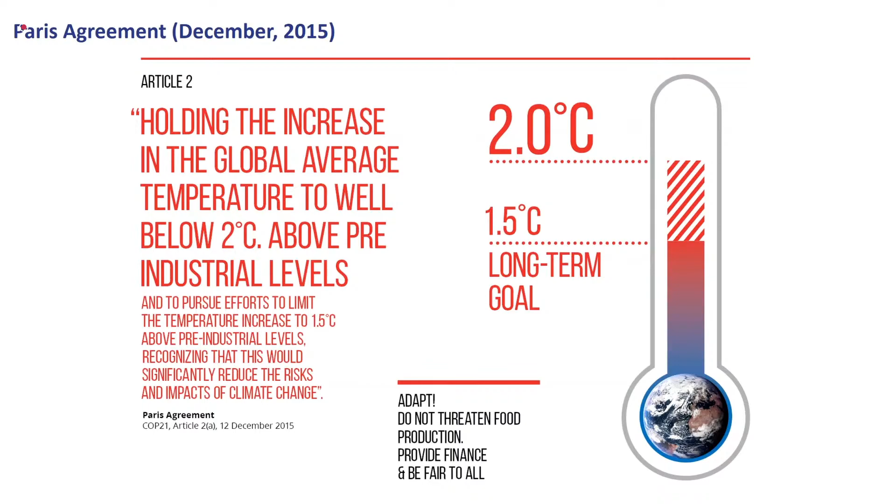There are many certifications, policies, pledges and targets going on right now. Even if we follow those targets and certifications, we could still end up achieving between 2.5 to 3.5 degrees Celsius. So how can we achieve a target of 2 degrees Celsius or even less, 1.5 degrees Celsius, which is the main agenda of the Paris Agreement?

So not focusing on the final goal, but limiting to the shortest goal they have actually launched, which was to attain 40% greenhouse gas reduction by 2030, and 95% greenhouse gas reduction based on current stage reduction by 2050.

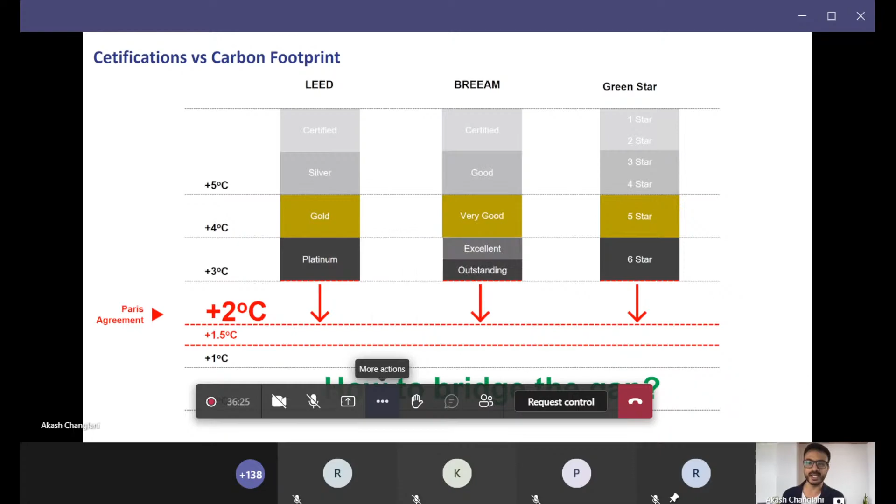There are some certifications you might know about, like LEED, BREEAM, Green Star, which are very commonly used nowadays. But even if you graph these targets, they don't actually help achieve what the Paris Agreement was aiming for. Even the highest certification level, LEED Platinum, only helps you achieve 3 degrees Celsius, not 2 degrees or 1.5 degrees.

So how do you bridge that gap? How do you attain such climate-free construction techniques? Foster+Partners is one of the first architecture practices which signed this net zero carbon building commitment.

And the company has also pledged to make all the buildings used by the practice carbon neutral by 2030. So I will introduce you to some of the approaches that can help achieve such intensive targets.

Let me begin with passive design. This is mostly the first thing that comes to mind when designing a sustainable project. This strategy usually takes advantage of the external climate to maintain a comfortable temperature range inside the room. Some strategies you might be aware of are natural ventilation, daylighting, shading, passive cooling and heating, use of renewable energy, and use of natural materials.

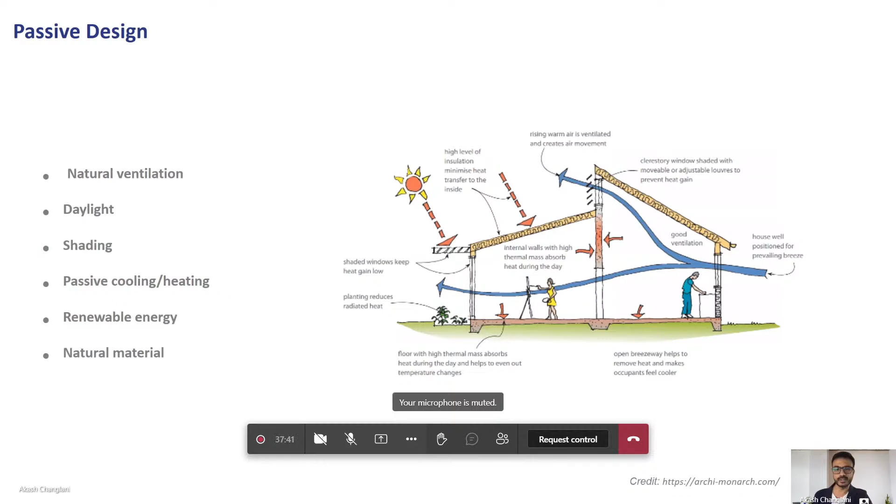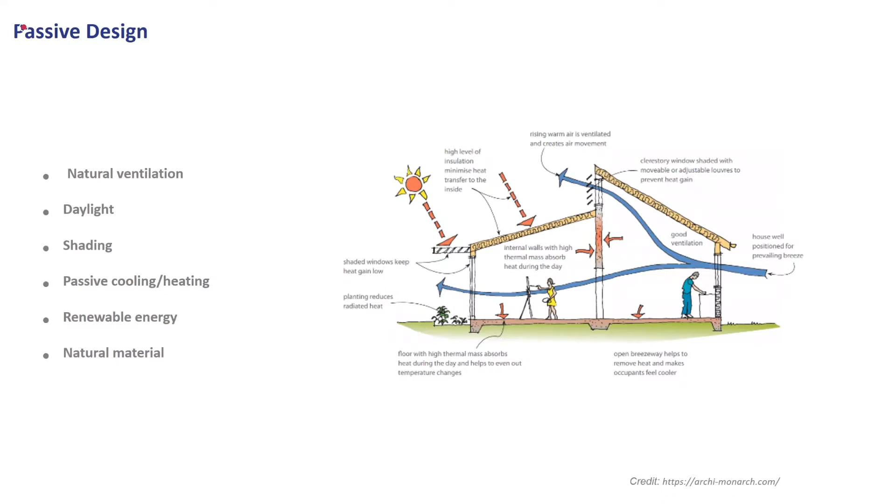You will come across such strategies in even more detail during your education. But today I'm not here to explain passive design or show examples of it. I will be taking this a little bit further.

After you have decided what passive features to include in your design, how do you quantify the performance, and how do you know that the comfort level of the passive system will be achieved? How do we know the strategy is working, and how do we achieve the optimal performance you're aiming for? So what is the next step to go beyond passive design for sustainability?

This leads to our second topic, which is performance-driven design. This section will show an approach to achieve and quantify optimal performance regarding several aspects. One approach is the computational design method, which includes three main steps.

You might be aware of tools like Grasshopper, which make crazy shapes and forms, but that tool can do much more than that. Those crazy shapes and geometries come under only the first step, which is parametric geometry, where you can alter the design based on parameters. Taking this tower as an example, you can twist it, change its height, or alter its cross section.

The second step is performance simulation, where you can run simulations using plugins within Grasshopper, available for daylighting, energy, radiation, wind, and many more. The third step is to optimize.

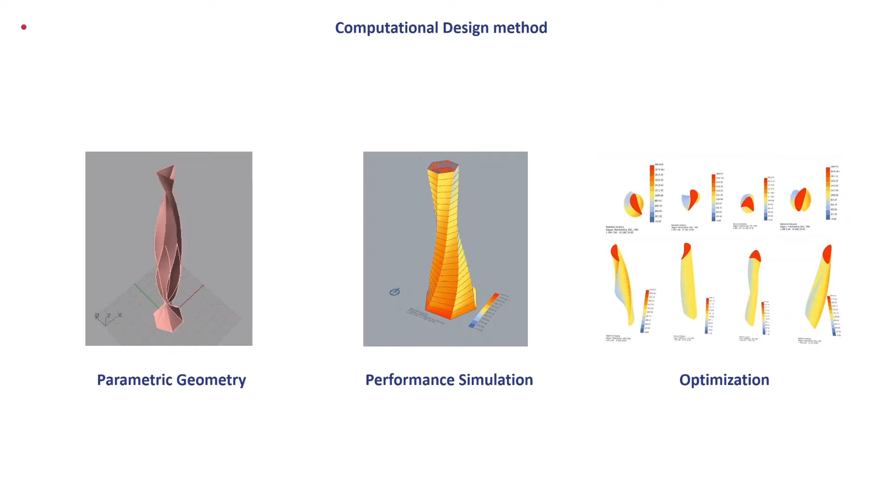Let me take you through one of the examples I worked on. This first project is my graduation master's thesis called Facade Elite, located in Rotterdam, Netherlands. The main topic was facade optimization for visual comfort through controlled daylight distribution in high-rise office buildings.

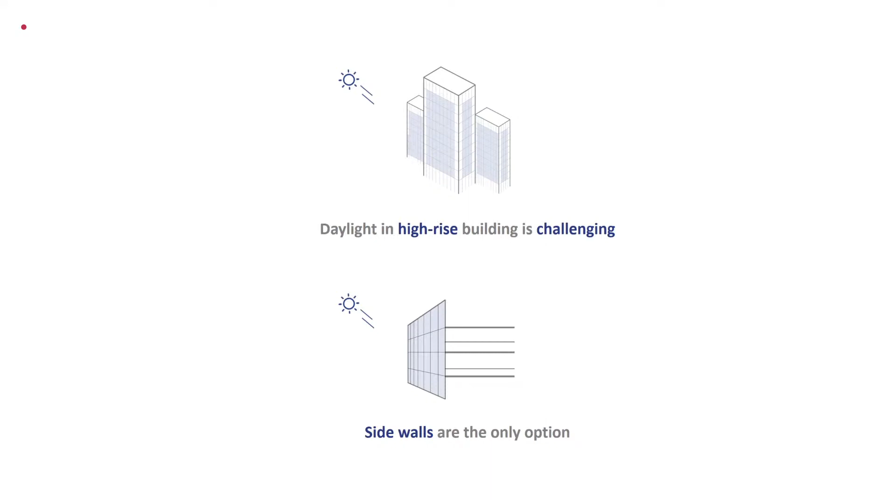Le Corbusier once said the history of architecture is the history of the struggle for light, and it still remains true. One current struggle is seen in high-rises, which pose a challenge because only side walls allow light to penetrate. In deep floor plans, like office buildings in high-rises, this creates glare near the window, and light doesn't reach the end of the depth.

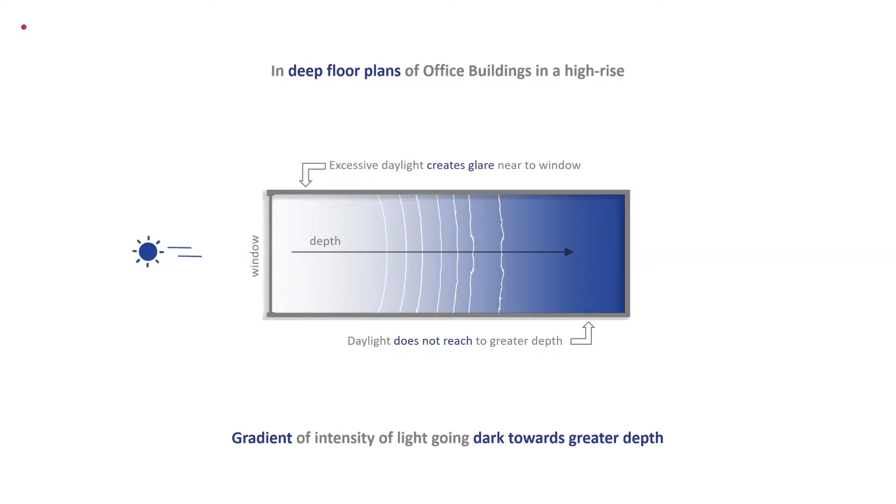This creates a gradient of light intensity that goes darker toward greater depth, resulting in a non-uniform distribution of daylight and visual discomfort for occupants of that space. You can see here how people react to these different light situations.

The ideal solution would be to bring a more balanced distribution of light along the whole depth. How can we achieve that? Here the solution is difficult, and we can question ourselves why. Because daylight has a dynamic nature, the daylight intensity and sun position change throughout the day and all along the year, which brings complexity into the design.

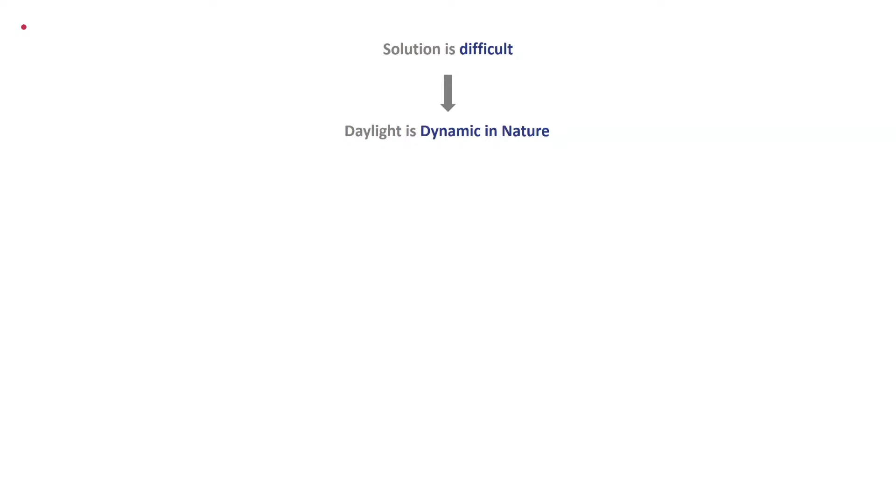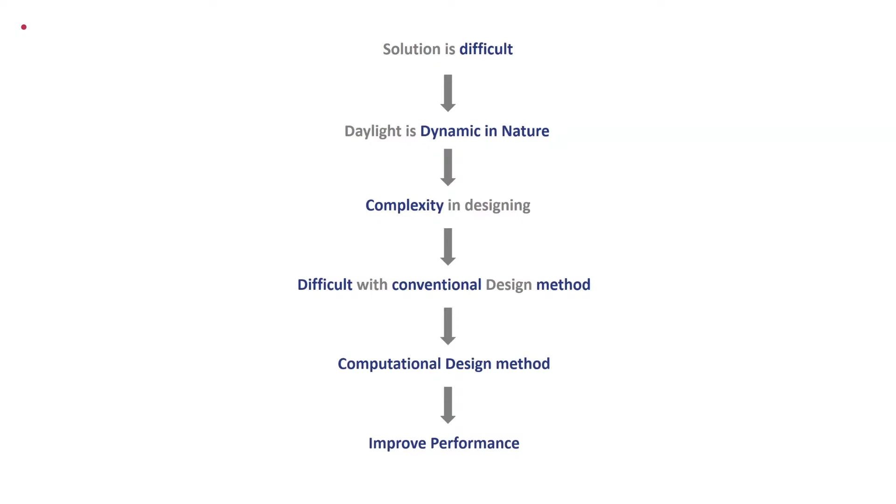So how can you achieve this? Usually with conventional design methods it's difficult to quantify how we will achieve it. Computational design is one way that allows us to solve this kind of issue, to have improved performance and get the most optimal solution.

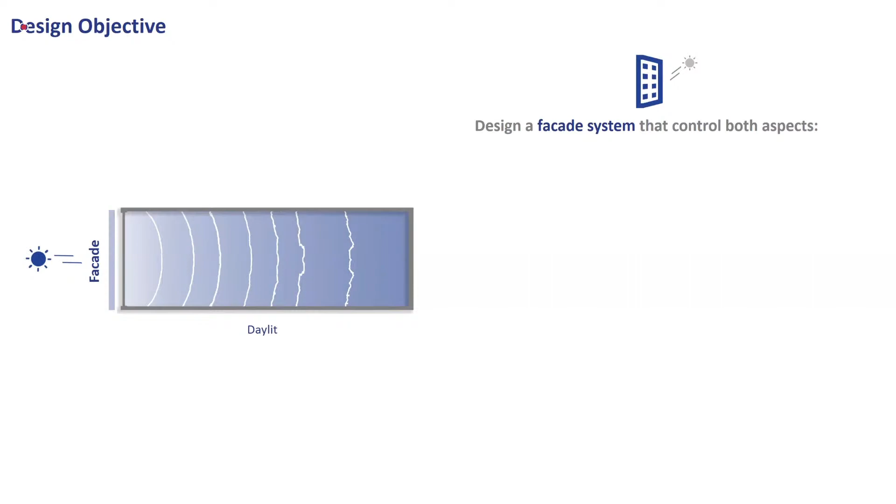My main objective in this thesis was to design a facade system that controls both aspects: enhancement of daylight for greater depth, and reduction and diffusion of daylight from the front, overlit zones that create glare, to achieve a uniform distribution. It should be adaptive and responsive to dynamic daylight, and in the end, it should provide visual comfort.

Based on this literature study, I formulated some visual comfort criteria, combining NEN EN 17037, BREEAM 2016 and some Dutch regulation, which could help me evaluate my facade performance. This includes factors which affect daylight: daylit area, average illuminance, uniformity ratio, glare, and contrast ratio.

Light is calculated in lux. Light between 300 to 2000 lux is daylit, a useful daylight range comfortable to the human eye. If it's more than that, it will create glare. And if it's less than 300, it will create some kind of blindness.

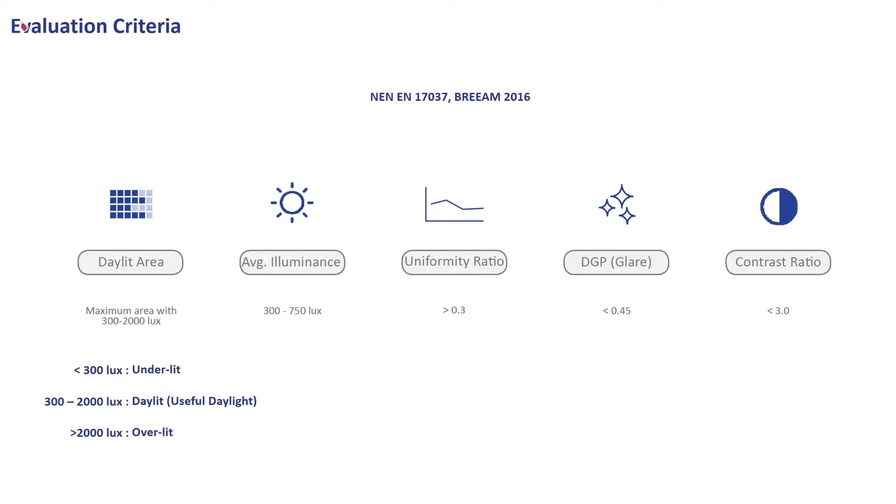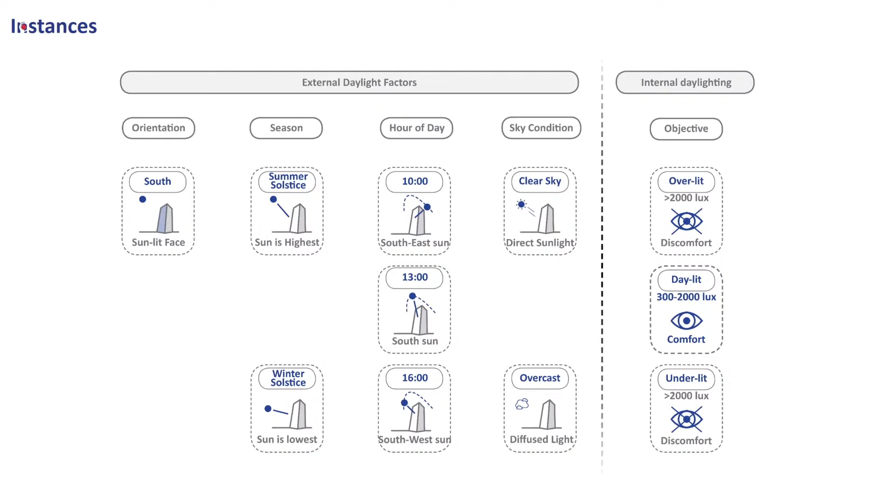After that, I selected some diverse external daylight factors from the dynamic nature of daylight. I chose a south face with 2 different seasons when the sun will be at the highest position and the lowest position, 3 different time periods of the day having different azimuth from east to south to west, and 2 sky conditions: direct sun and no sun with diffuse light. The final goal is to bring all different conditions into the daylit range.

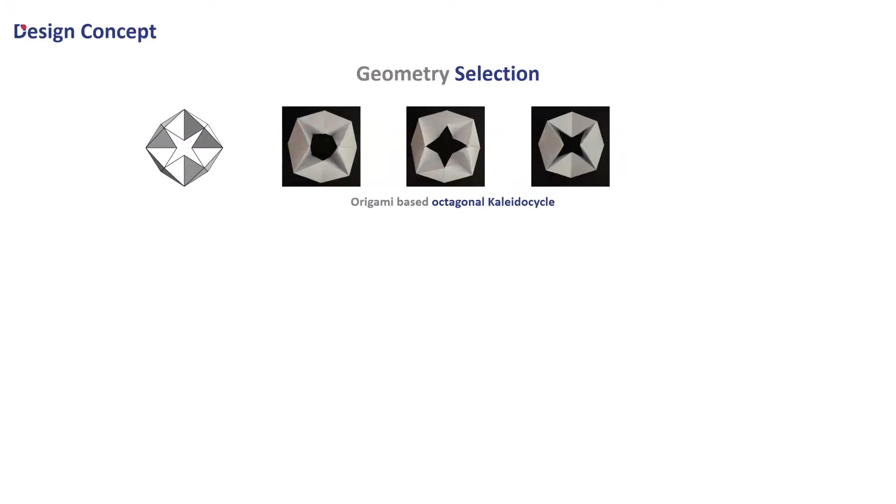I began my design concept by taking an octagonal kaleidocycle, which is a dynamic geometry. I divided it into different parts and selected a pair of tetragonal disphenoids for my facade. I modified this module further to give it a fold, which can fold like this, as you can see in the GIF. This allowed me to have 8 different kinds of variations.

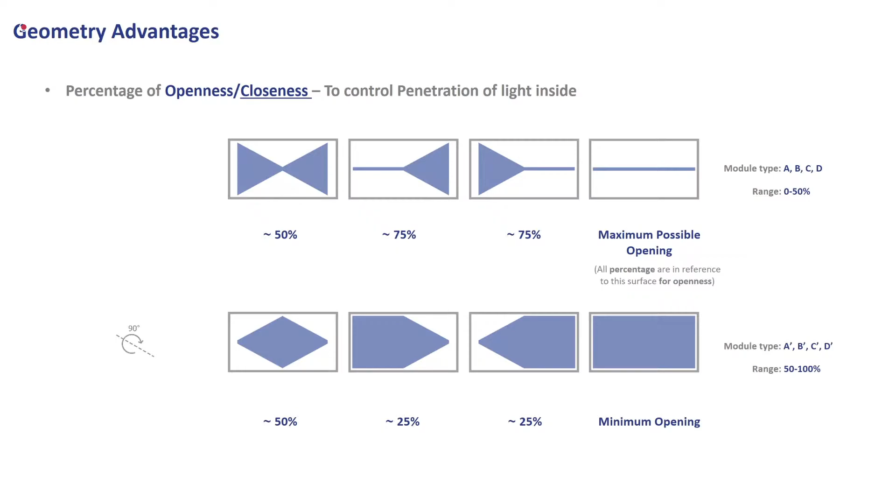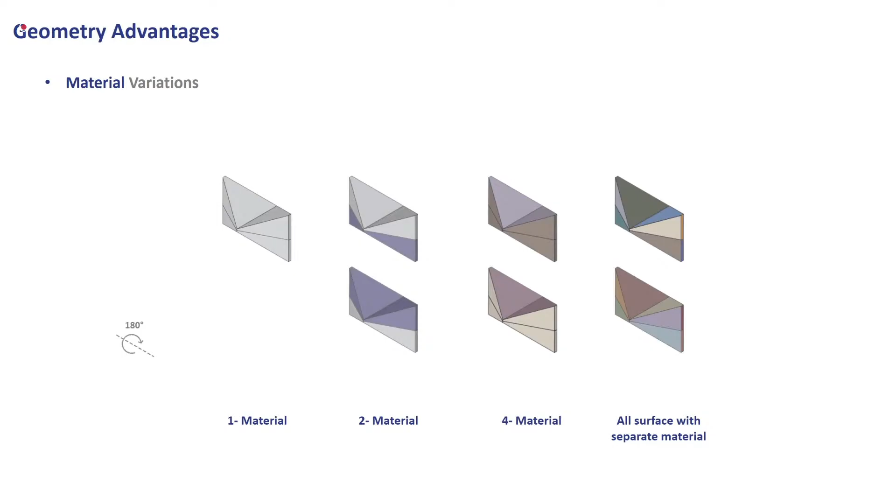Now let me show you what advantages it brings. First, it allows control of the percentage of openness and closeness for penetration of light inside the room. It also allows me to control the surface available for redirecting and blocking incoming light through different available surfaces, and I can give different materials with different optical properties on different surfaces. So it allows a wide range of possibilities to control percentage of openness when configured as facade.

One modification I added was to have the top 2 rows rotate inside to reflect light to greater depth, and the bottom panels rotate outside to diffuse light in front of the room.

After developing the concept, it was time to apply the computational design method, where the geometry will be converted into parametric geometry. Then we will apply daylight simulation, and then it will be taken into optimization. The result should meet the evaluation criteria I showed before.

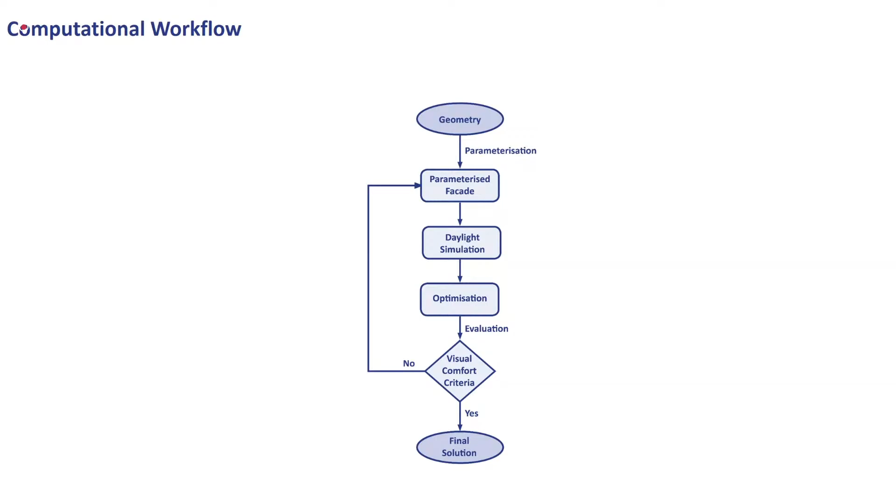If it doesn't meet the evaluation criteria, that geometry will be taken back to the parameterized facade and some modification will be made. It will again be taken into the same workflow until we get a yes answer. And if we get all yes answers, all solutions that fulfill the visual criteria, then we consider that our final solution.

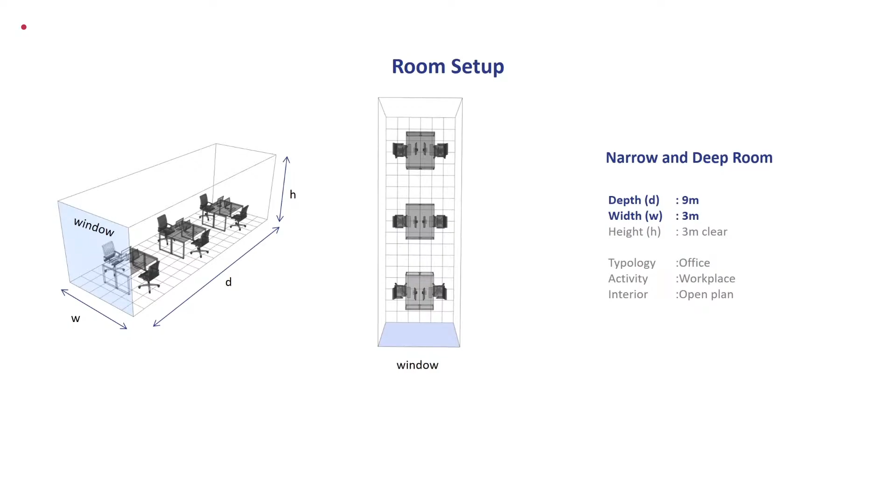So let's begin with parametric modeling, made using Rhino 3D and Grasshopper 3D. For the room, I took a room of 9-meter depth, with width and height of 3 meters. It was an office typology, workplace, with open plan interior.

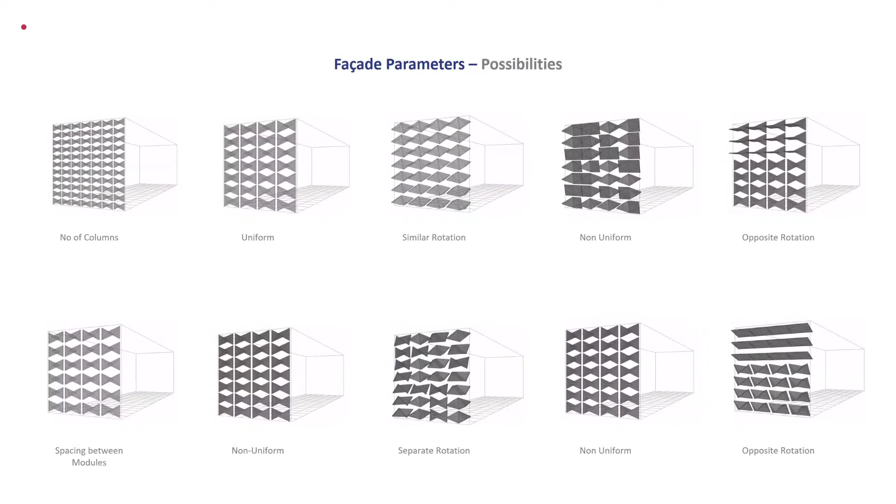I tried some possible parameters for the facade, and you can see here some options like number of columns, uniformity, similar rotation, non-uniform rotation, and non-similar arrangement. All of these were tested, but to simplify the design process, I chose only 3 of them.

The first was rotation, separated by row—each row can be rotated separately. The second was module type, which can change individually based on all 8 options that I showed before. And the third was material set—I gave 2 different material sets on the top and bottom, which can rotate 180 degrees to give different properties.

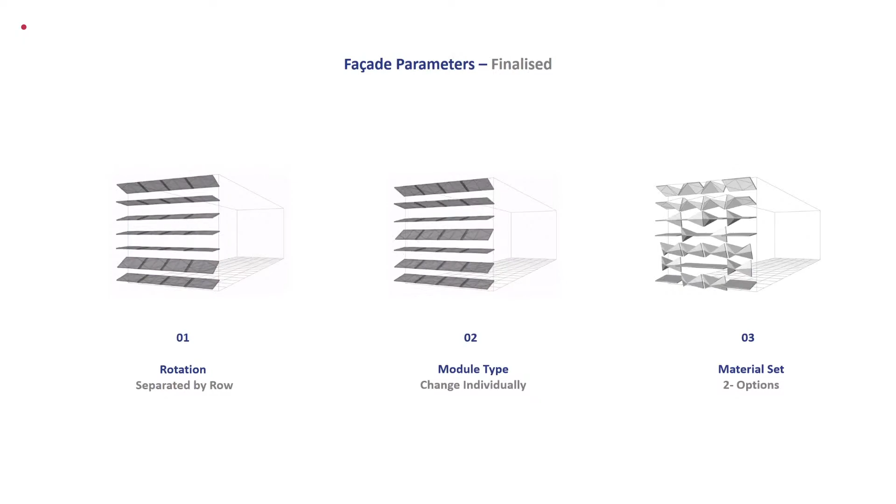This geometry, after parameterizing, was taken to daylight simulation, done using Honeybee and Ladybug. Here you should understand how to read this daylight distribution diagram: the red portion shows areas where lux levels are above 2000, which creates glare.

This red area can also be said to be overlit area. On the other hand, the dark blue represents area with lux level less than 300, which is said to be underlit, creating blindness. All in between is the gradient within daylight range with different intensity of lux. The value below the image represents illuminance value, which is 2805 lux.

The second image shows only two different colors, where gray represents the useful area, which falls within 300 to 2000 lux. It clearly indicates the white area is what we need to achieve, and this white area needs to be all over the depth. The black area shows either it is above 2000 or below 300, which we don't need and want to avoid. The percentage shows how much of the floor area is useful, which is needed for us.

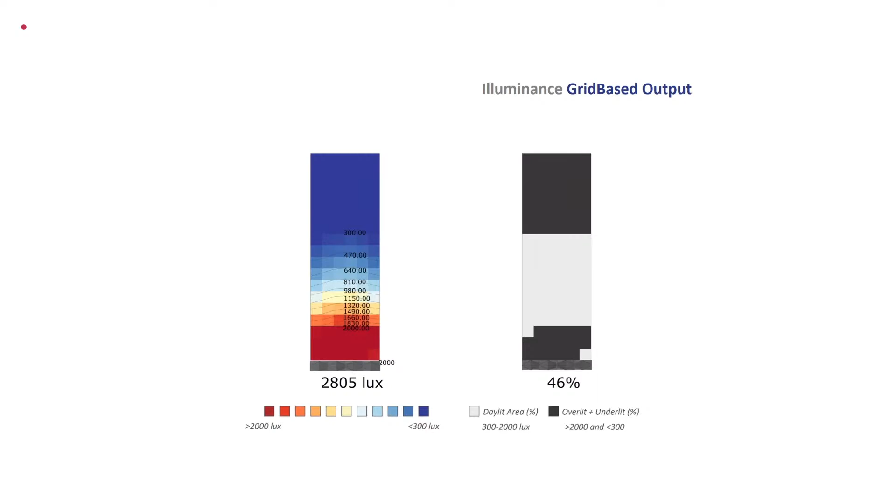So I made some of the simulations without my design facade, just to understand at different times how the daylight is actually acting in this same space.

After setting up the design daylight simulation, I took this process further to optimization, which was done using a tool called Wallacei.

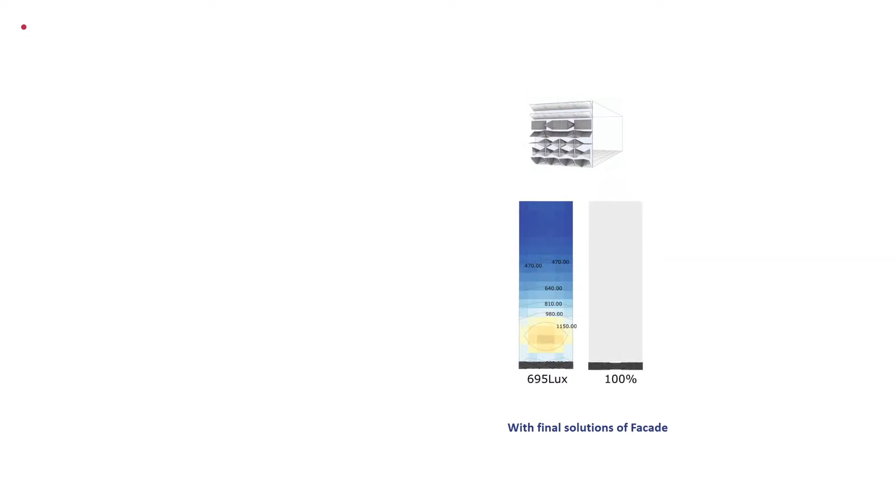Here you see the final solutions from the optimization, which used the facade with different configurations for all 12 instances. This shows with only glazing.

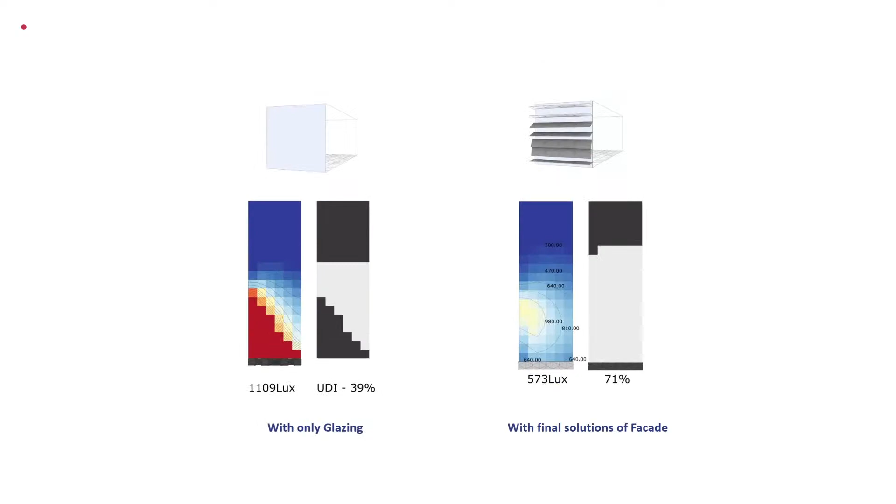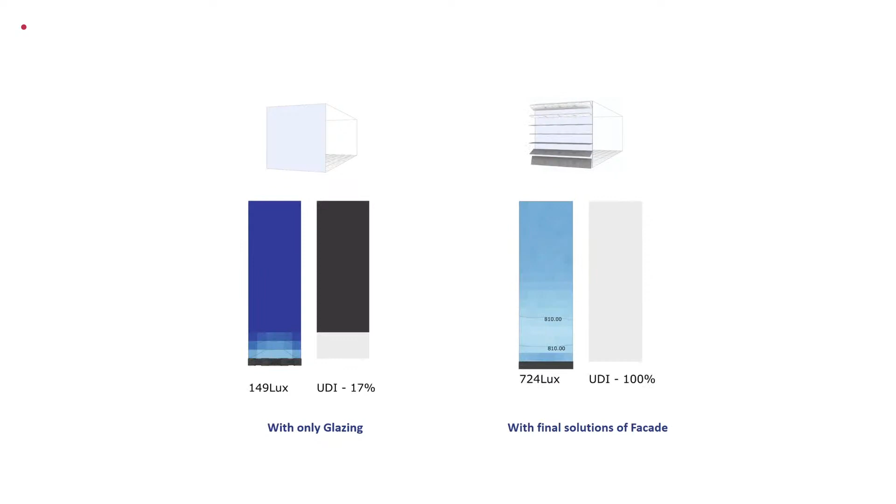You can see in both of them, in the final solutions, the red area was almost neglected and the blue area was reduced at a large space. And if you see on the other diagram, the white area has been increased a lot.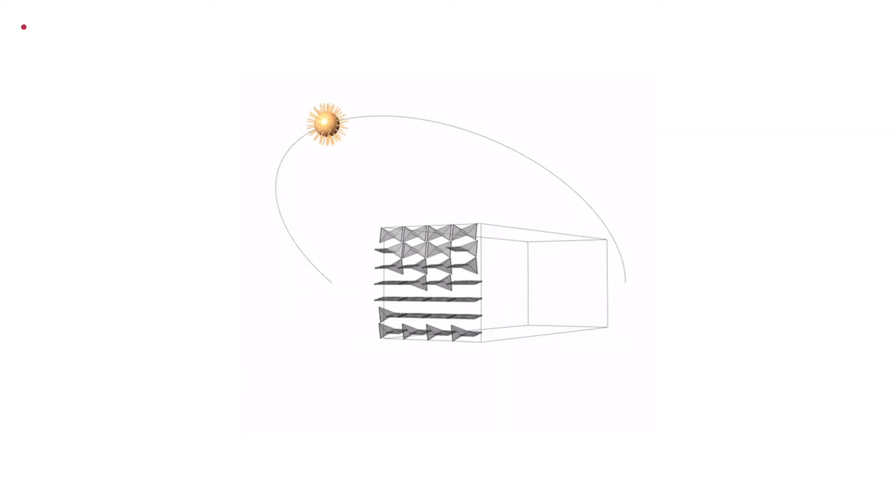You can see one of the GIFs I prepared showing how this adaptive facade will react to the motion of the sun. As the sun changes its altitude or azimuth, the facade will take its optimal position to give good daylight inside.

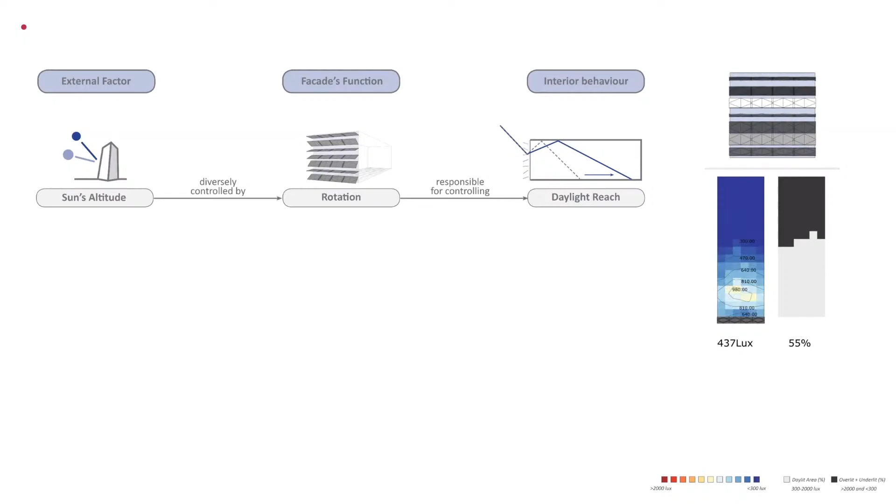Along this process, a conclusion was derived on facade performance about the relation of the facade's features with external factors as well as indoor behavior. It was found that changing sun's altitude was diversely controlled by rotation and was responsible for controlling daylight reach.

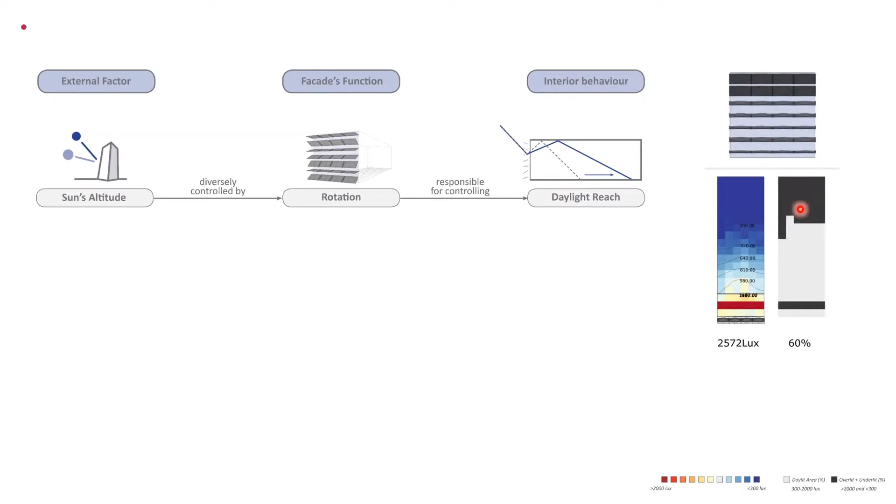Here you can see how this range is getting increased just by rotating itself. The daylight which used to reach only until here, but with this facade, it was reaching until this depth.

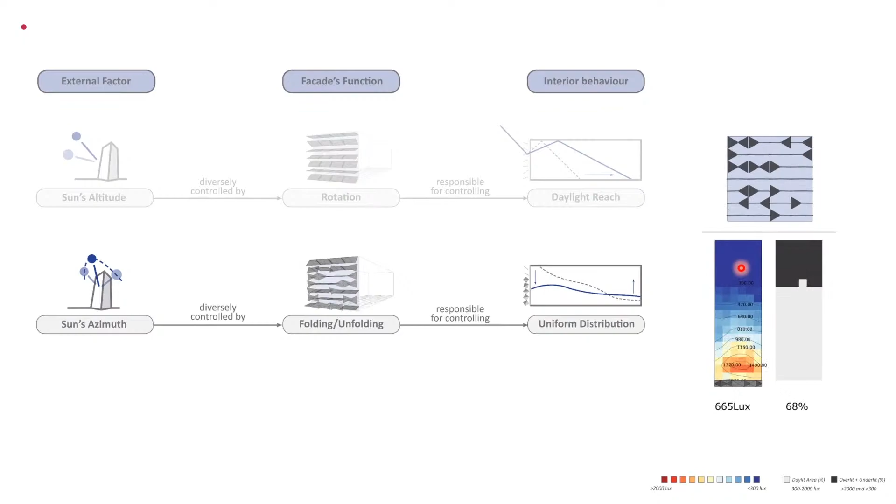Second was the changing sun's azimuth, which was diversely controlled by folding and unfolding and responsible for uniform distribution. While changing the azimuth, this module was taking its own shape, which was creating a uniform distribution - reducing intensity from the front, reducing the red part, and increasing the intensity at the back, which was also reducing some of the blue part.

You can see some of the configurations used for the simulations. The third one was change in sky condition, diversely controlled by different material sets, and responsible for controlling light enhancement.

One material was with low intensity, and the other material was with high intensity of reflection. So if we just change those materials, the light intensity can go from bottom to top, and you can see here it was increasing almost about 4%. That's how some of the results were concluded and achieved.

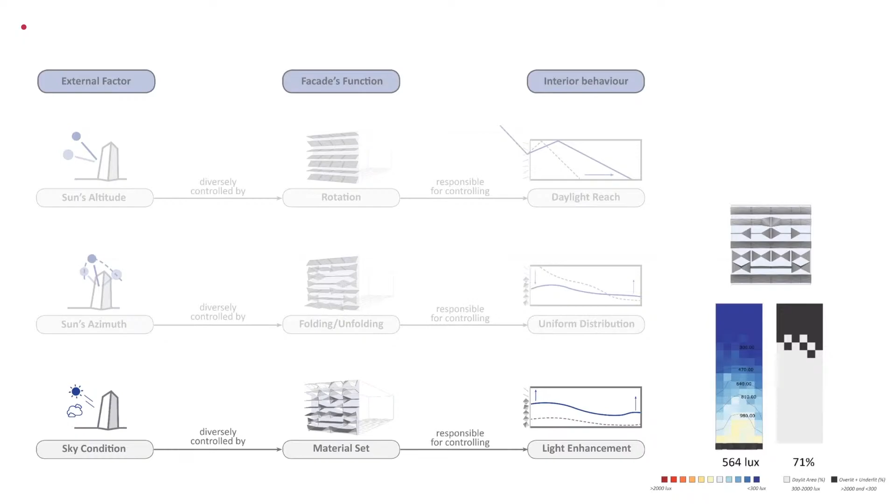All the results data were actually noted in a table with different kinds of evaluation criteria.

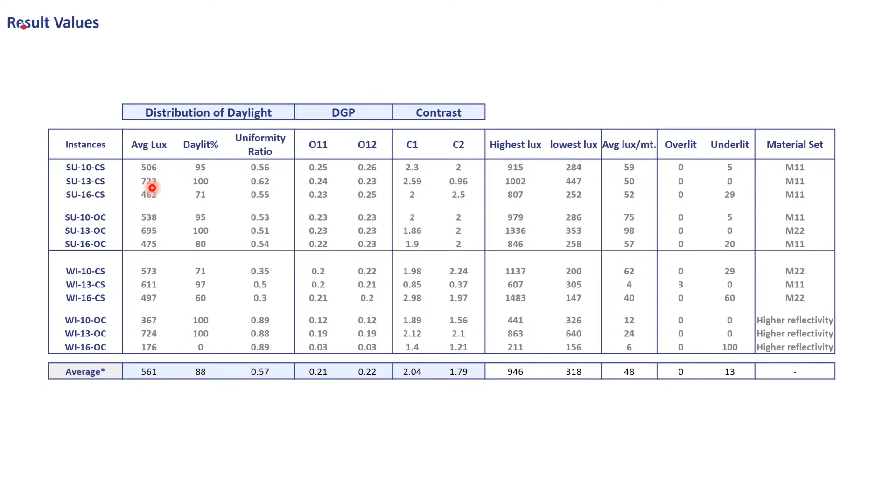After concluding and calculating all the information, an overall result of 88% daylit area was found, with 561 lux as the average illuminance. The requirement was to be between 300 to 750, which I achieved.

The uniformity ratio should be more than 0.3 as per BREEAM. I achieved 0.57, which was also a positive result, and it was having no risk of glare and no risk of contrast throughout the depth.

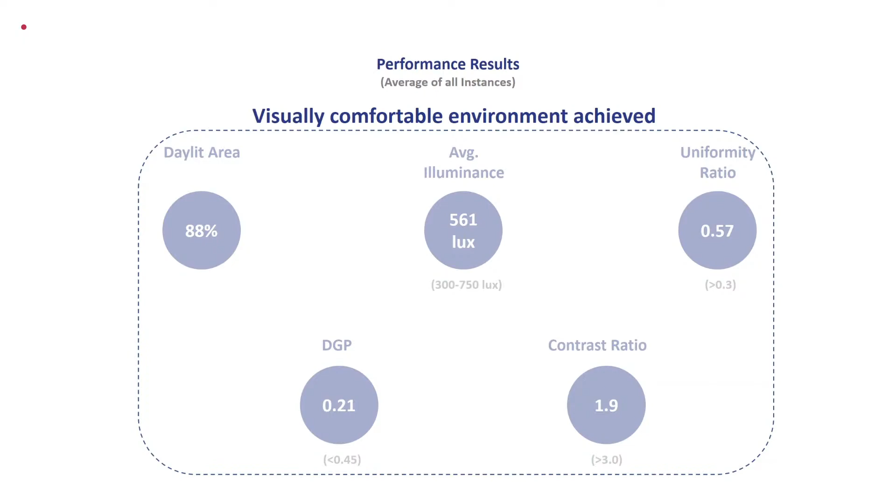Based on gaining this result, it was finally concluded that a visually comfortable environment within that room was achieved.

Average illuminance of 561 lux, which is close to 500 lux, was the requirement by CIBSE for the office, and it was achieved.

Uniformity ratio, as per BREEAM, states that it was required to have 0.5 to 0.7 for artificial lighting, whereas my facade achieved a ratio of 0.57 through daylighting. This concluded that I successfully achieved a homogeneous distribution desired by artificial lighting, but by avoiding artificial lighting, only using my facade lit, you can achieve that kind of homogeneous uniform distribution ratio.

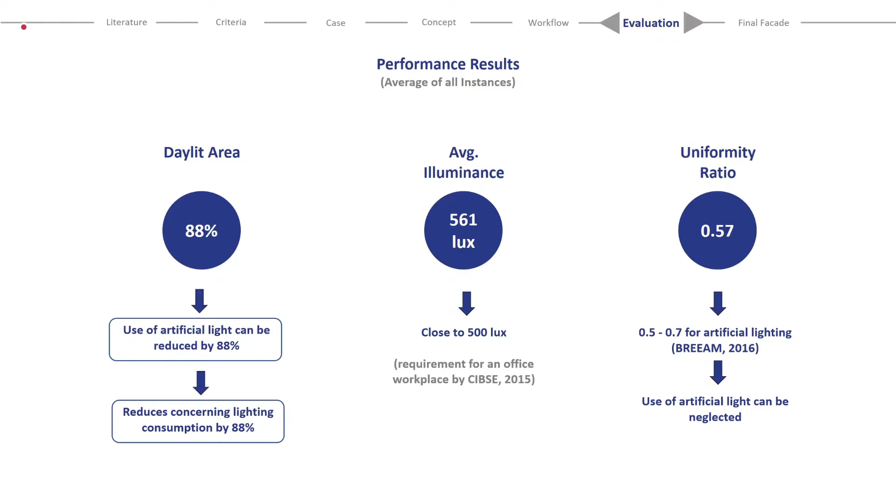After getting the evaluation criteria and results, it was time to take the facade into detail mode and do feasibility checks. The facade was given 3 different modules: one was the PV module, the second was a reflecting module with specular material to reflect light, and the third was a diffusing module with rough material to diffuse light.

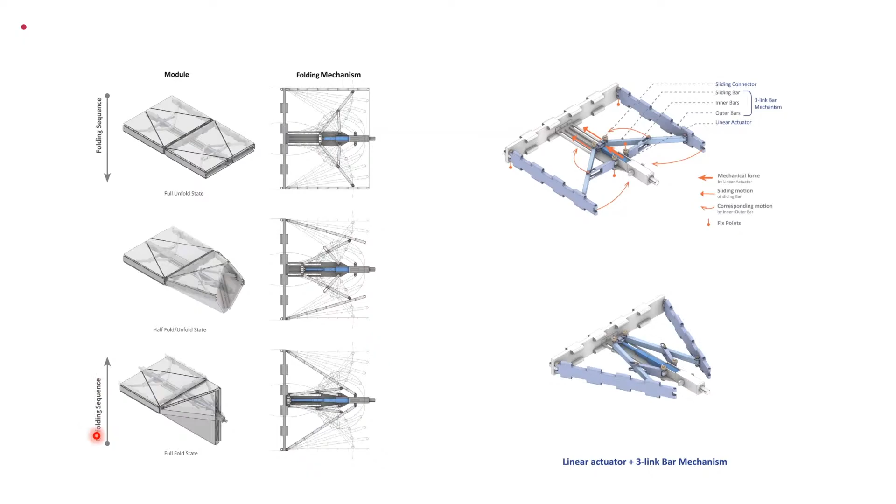The rotation mechanism for dynamism in the facade was actually given by a rotary actuator, and a folding mechanism was done using a linear actuator and 3-link bar mechanism. You can see here it shows the folding mechanism and the unfolding mechanism.

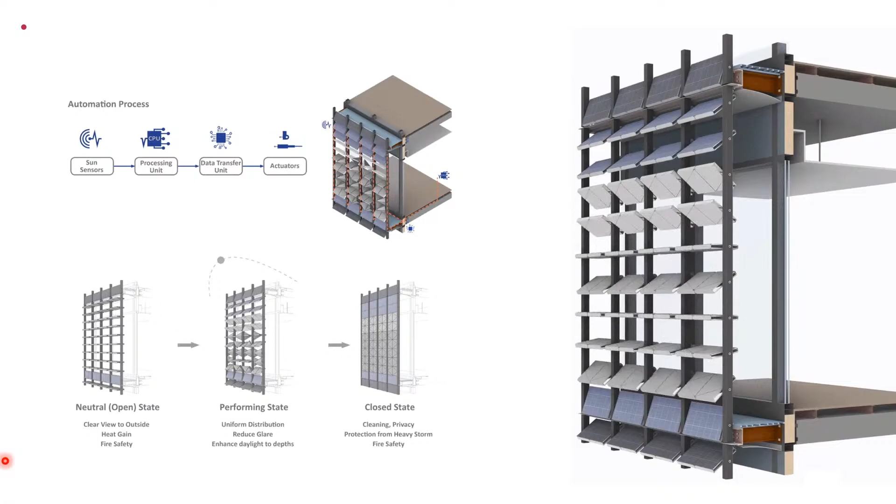A sensor system was proposed which will send the sensor signal to the processing unit, which will then send the signal further to all the actuators, determining which module has to move where and which module has to fold and unfold. Based on this, different positions of the facade can be achieved, which could be a neutral state, performing state, and closed state. You can see here some visuals.

At the end, this facade was also compared with the existing example, which is Al Bahar Tower, Dubai. Maybe you might have seen this tower, which is also a dynamic facade. It was found that the facade lit was almost 53% lighter than Al Bahar Tower.

This can mean that the cost required for facade lit would be about 50% lesser. Based on some research, it was found that facade lit was actually performing 48% higher than how Al Bahar Tower is performing. So that's how I concluded one of my projects.

I will give one more example on performance-driven design. This project was based on a competition released by the European Commission, called LOI 130. It was a multifunctional complex for the European Commission. The brief was to design a mixed-use complex of 198,000 square meter floor area distributed amongst high-rise, low-rise, and mid-rise.

The program included office, housing, retail, and recreational facilities. The main objective of this project was an integrated approach to create an energy efficient and sustainable design outcome. I won't cover the whole project, but I will show the main aspects of how performance-driven design was applied to such a large architectural scale project and how decisions were made.

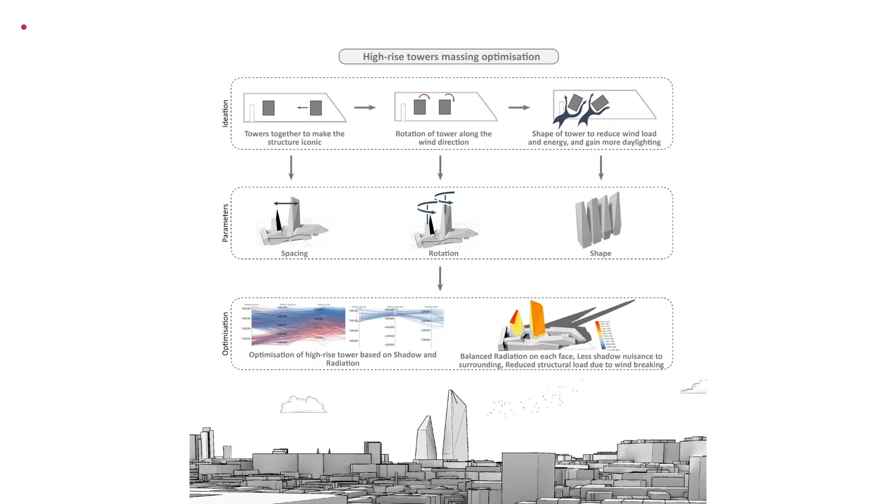We actually ran this simulation based on some objectives we wanted to achieve: balanced radiation on each face, good daylighting on each of the surfaces, and due to wind, the structure should be lightweight. So somehow we achieved the result for our tower.

The second thing was to bring a massing design for the low-rise and mid-rise towers. So we arranged the low-rise and mid-rise massing around the tower. The idea here was to bring sunlight inside the central plaza, because it was an office space, and in the afternoon, people used to go downstairs at the ground floor to have lunch.

So we needed direct sunlight for that space between 12 p.m. to 2 p.m. How could we achieve that? We arranged the cube massing all around the space, and threw sun rays from 12 p.m. to 2 p.m. into that plaza.

All the sun rays which were intersecting the cubes, we removed those cubes, and somehow reshaped those modules based on our design principles. That's how we could actually achieve 2.6 hours of direct sunlight into the central plaza.

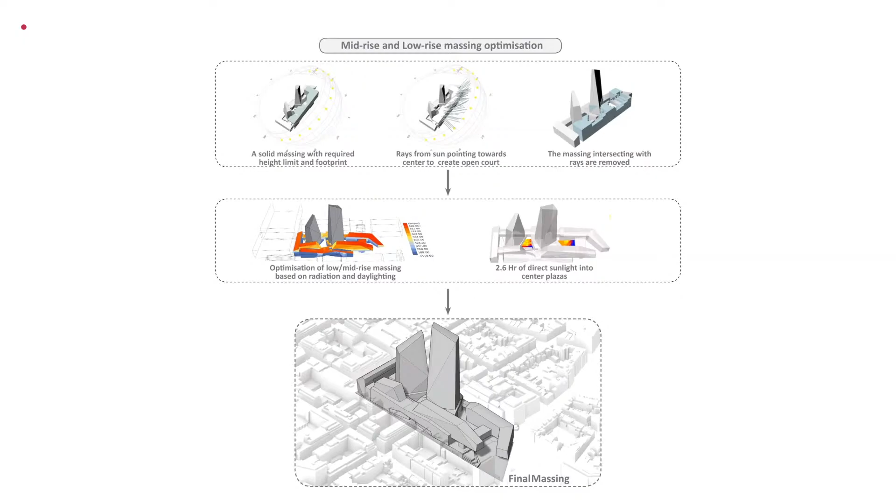So these are some of the approaches for how you can achieve results that you can quantify and justify. Finally, we achieved a final massing from these two different approaches, and then a program was distributed for the massing, which had offices, housing, recreational area, retail, as I already mentioned. After having the final mass, you can still do more analysis and make design decisions.

The first one was radiation analysis, where we analyzed which surface has more potential for PV panels. So while designing the facade, we could arrange PV panels on those surfaces where we'd get the most out of the result. Doing this, we achieved a 34% offset just by using PV panels on the surface. You can see the yellow portion where we used the PV panels.

The second was to create some kind of comfort level for pedestrians at the ground floor, to neglect the wind tunnel effect. For that reason, we applied wind analysis, and could optimize the massing based on wind stress to achieve a comfortable pedestrian experience.

The third one was to understand how traffic affects the massing in front of it, because traffic can produce noise and pollution. So we also did some acoustic analysis on how this traffic can act on the surfaces. Based on this, we decided that a green facade could be the best solution, which can help reduce the noise and pollution from the street.

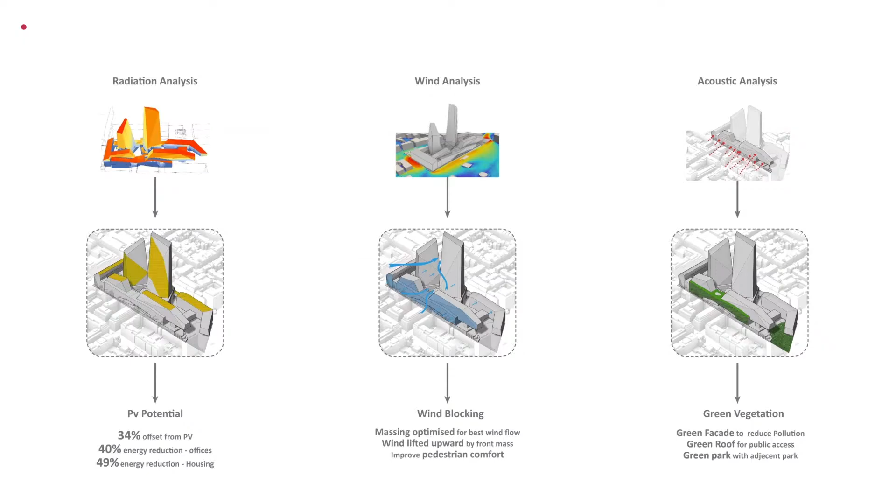So these were some of the performance-based decisions we made in this project. One of the places where I worked, OMRT, as a computational specialist, we did several kinds of performance analysis for different scales of projects. I'll just run through what different kinds of analysis are possible at different scales.

At the building scale, different kinds of analysis that could be done are daylight analysis, energy analysis, CO2 analysis, radiation for PV yield, and PMV comfort, which is like microclimate. This can be done for design decisions on a refurbished building or a new building. Based on this analysis, you can also do different kinds of optimization based on your own requirement. One project involved only optimizing the shading elements, so we ran all this analysis just to optimize shading based on these different aspects.

You can also do simulations and decision-making for urban scale projects, which includes wind analysis, acoustic analysis, UHI, which is urban heat island, shadow analysis, and view to sky. Here, the idea was usually to perform analysis to make further decisions.

But here it was completely from scratch. We had to create different massing options using generative design again, and all different kinds of simulations were applied to all the different options. After that, we came to a decision on which option was working well. That's how this whole process of performance-driven design goes.

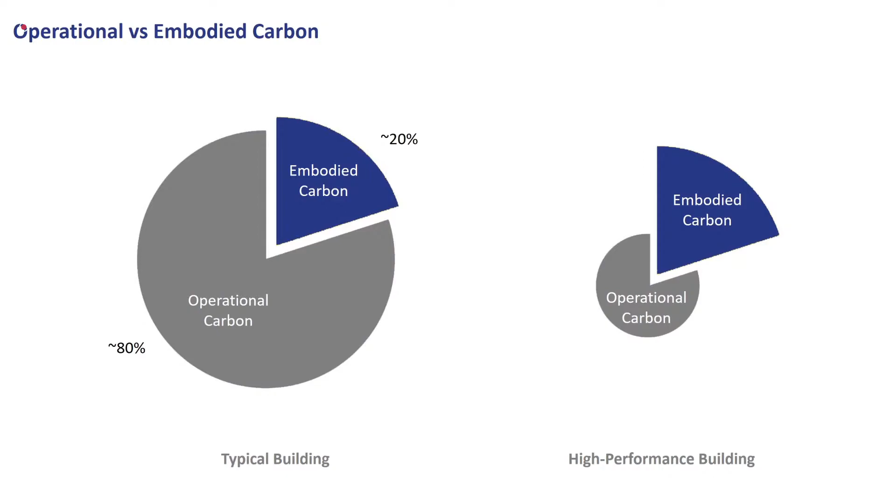So what about the building itself? After optimizing the use stage of the building, what about the building as a material? What about the carbon footprint released in creation of the material used in the building? And what about the whole embodied carbon of different processes like transportation and production?

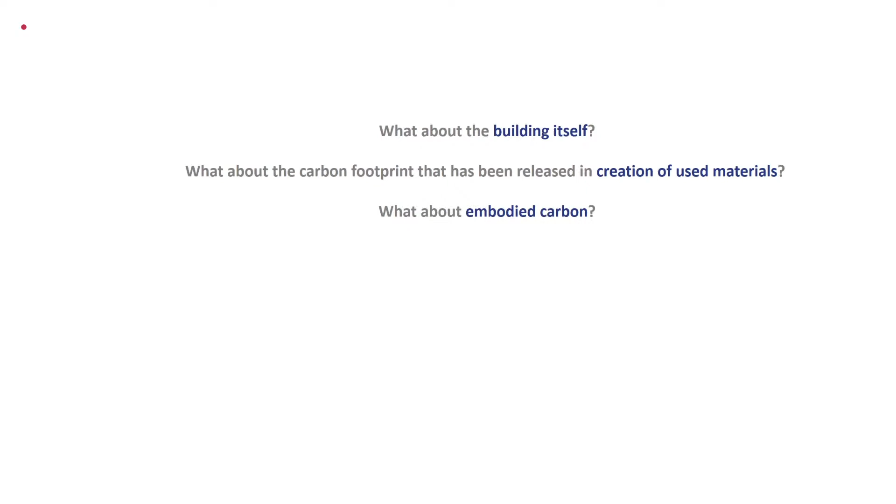So what is the next step to go beyond performance-driven design for sustainability? This leads to the next topic, called carbon negative design, which is actually a combination of both operational carbon from the last topic and the embodied carbon, which will be covered in this topic.

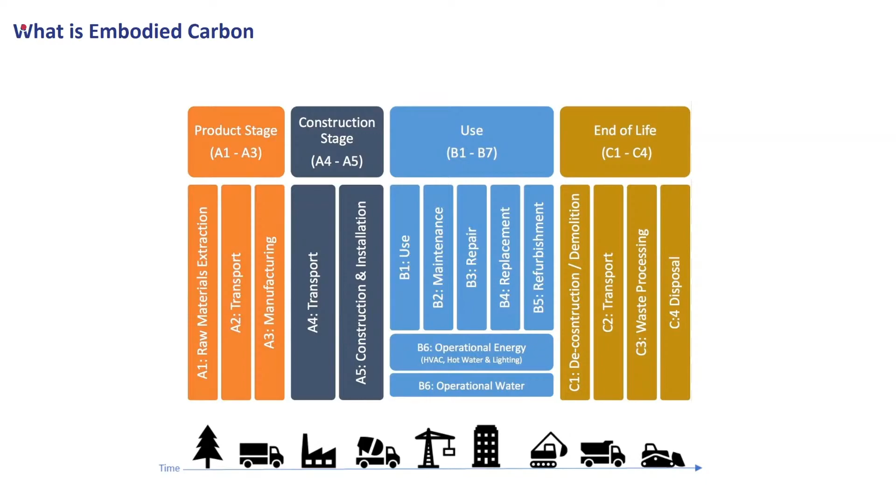Let me begin with understanding what embodied carbon is. The construction process usually includes four different stages: product stage, construction stage, use stage, where operational carbon we saw is a part of this stage alone, and end of life. So at each stage, energy is used and greenhouse gas emissions are released. So how can we account for such emissions, and what ways are there to reduce it?

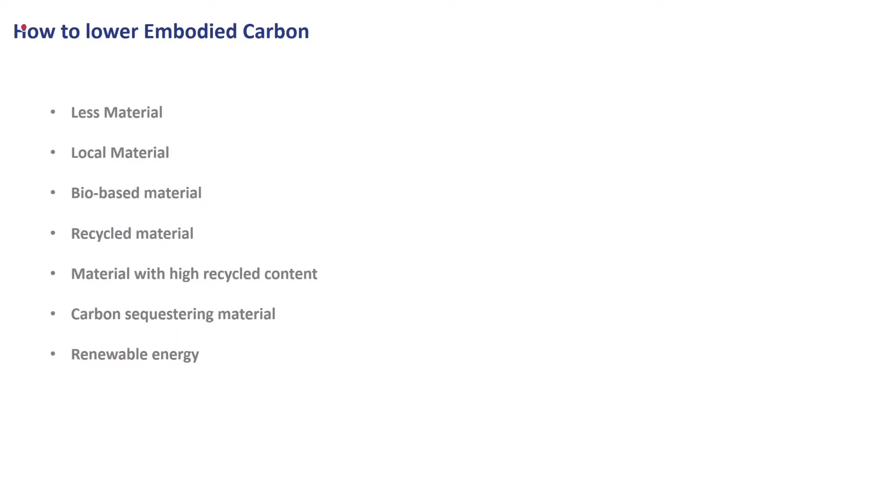The answer for this is simple. We should use less material. We should use local material, bio-based material, recycled material, or material with high recycled content, or even carbon sequestering material like wood, which throughout its lifetime takes in carbon. That's why we call it carbon sequestering material. And we should use renewable energy even for production of the material, not only for the electricity of your own houses.

So I will take you through one of the projects we did in our university. The main objective of this project was to study the facade of an existing educational building in Utrecht, Netherlands, and redesign the facade based on issues from the existing condition. The challenge was to make the redeveloped facade more sustainable and easily replaceable.

The existing facade was studied and analyzed for carbon emission, where each component of the facade was taken and calculated by volume, then multiplied by its carbon value per cubic meter. When plotted on a graph, it was found that the aluminum shading element had the highest carbon emission value.

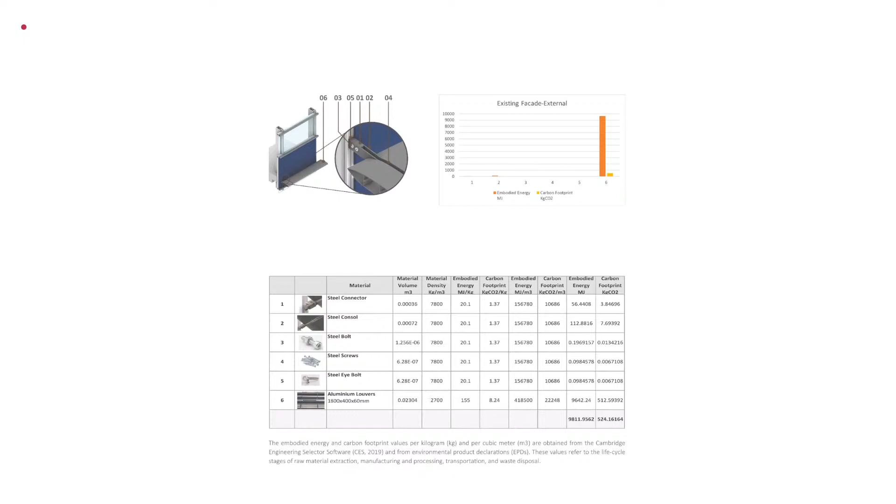This led us to a decision to replace aluminum with a more carbon negative material, which we took here as wood. A new design was prepared where the shading element was stacked vertically, again to avoid sagging of the louvers. These wooden planks were twisted 90 degrees to create an opening for light penetration inside and a view to outside.

Even after that, a second layer was added by infilling growing creepers, which had the purpose of providing thermal comfort that can adapt with different seasons.

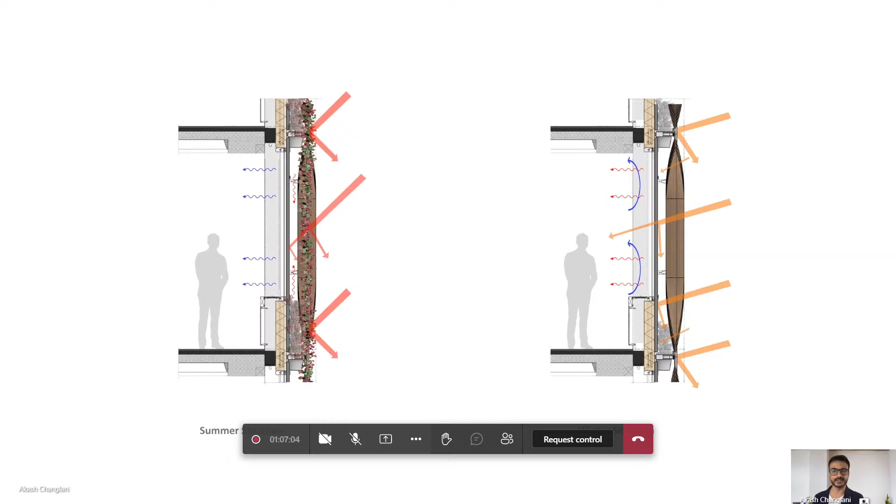In summer, the plant experiences growth, which fills some of the gaps, and this will block incoming harsh sun and reduce heat gain inside. During winter, the plant experiences fall of leaves, so this will free up the gaps in between to allow direct sunlight for heat gain, which is needed in winter. So this kind of thing was dynamically achieved, adaptive to different seasons.

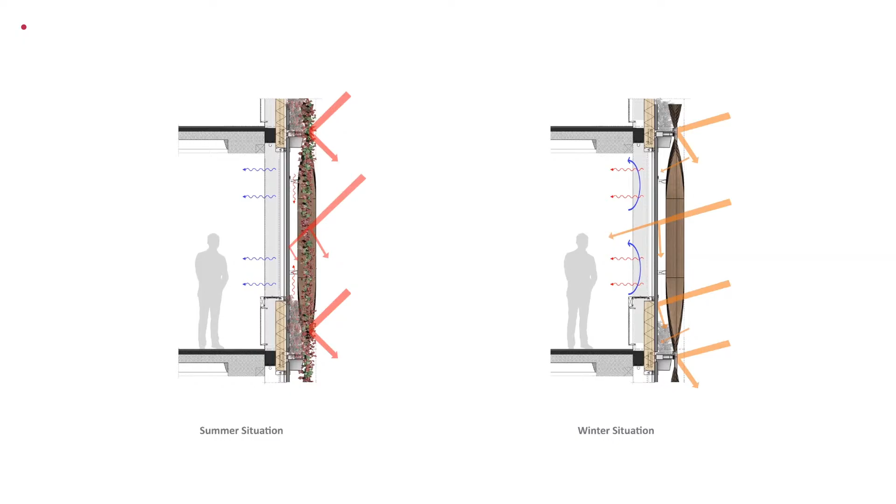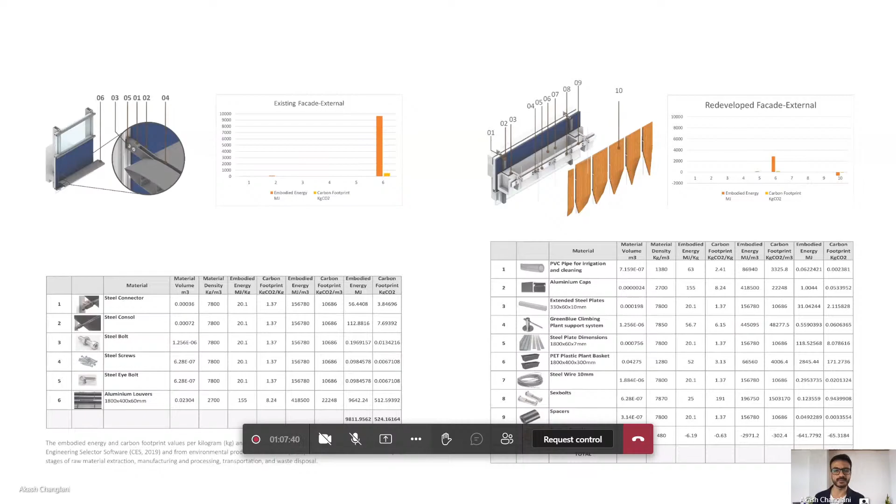After finalizing the material for each element, the redeveloped facade was calculated for carbon emission using manual calculations, and this was compared with the second skin of the existing facade. A notable reduction of about 75.9% was achieved. Usually this approach is taken in a way that all different components of the facade system are separated based on different materiality.

Each material has a different embodied carbon, embodied energy, and carbon footprint value throughout its life cycle, how it is made, and what happens at its end of life. So basically the idea here is to gain the volume of all these different elements, multiply that volume by the carbon footprint and embodied energy per cubic meter, and this will give you the value of how carbon intensive your facade or design is.

When you do a summarization, it gives you an idea of what you want to reduce. So by just changing a few materials and some design strategies, we could achieve an average of 76% reduction in carbon itself. With a similar approach, you can quantify your result, and using the right material, you can reduce embodied carbon from its construction stages. But now what happens after the end of life cycle of any building?

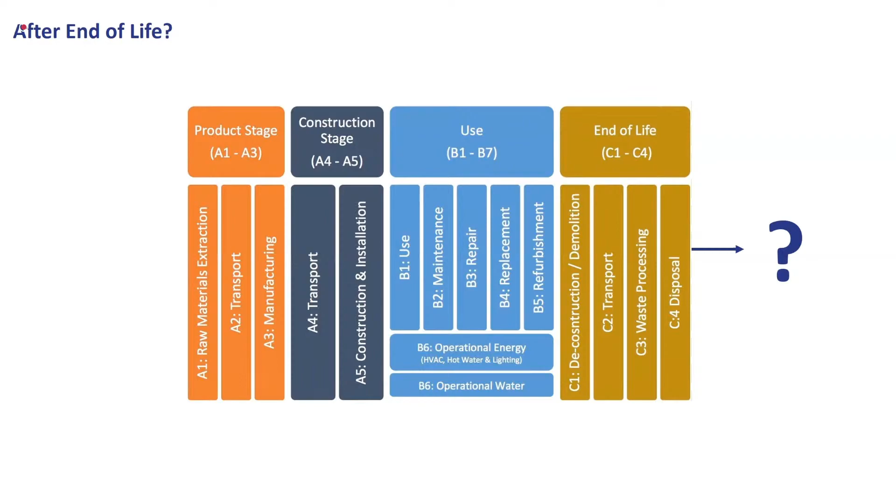So basically the construction waste goes into landfill and increased dumps. So what can be done at the end of life cycle of the building to avoid that, and how can we avoid construction waste going to landfill? What is the next step to go beyond optimizing embodied carbon for sustainability? Is there anything we can do after that?

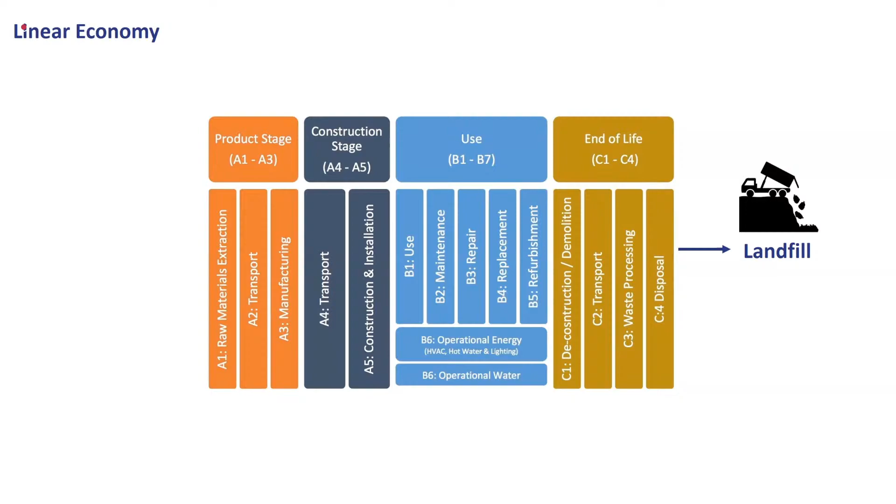Yes, this leads us to one more topic, which is circular economy. The process of going from construction stage to sending material to landfill is called linear economy, where steps happen in just one linear way. But instead of sending material to landfill, we can add one more stage of recycling and reusing demolished material and bringing that into new construction. This completes a circular cycle by circulating used material and avoiding the creation of new material, which avoids new carbon emissions.

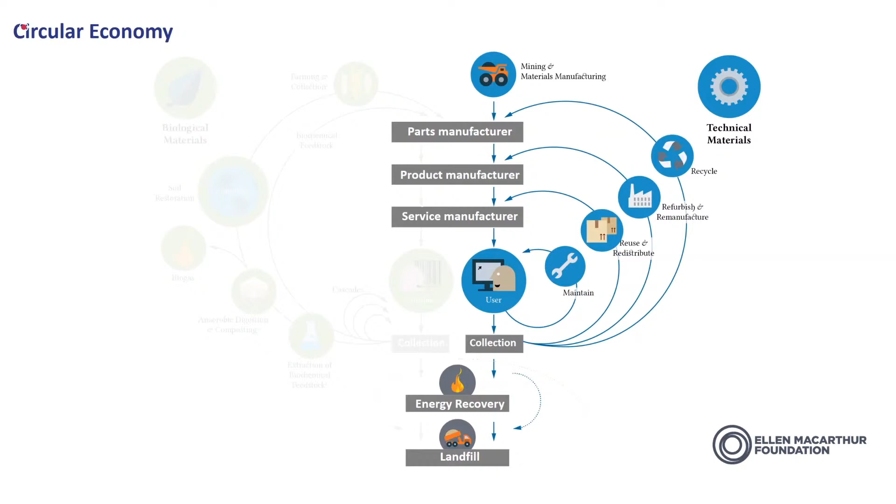This is the diagram presented by Ellen MacArthur, which shows two different cycles: biological material on the left and technical material on the right. Today we'll focus on technical material. What this indicates is, before sending any material to landfill, it should be sent back to individual manufacturers for maintaining, reusing, refurbishing and recycling. Depending on the condition of that used product or material, it can be recirculated into different manufacturers. Only when it's of no use anymore does it go to landfill. So you are saving several cycles of carbon emission in this process.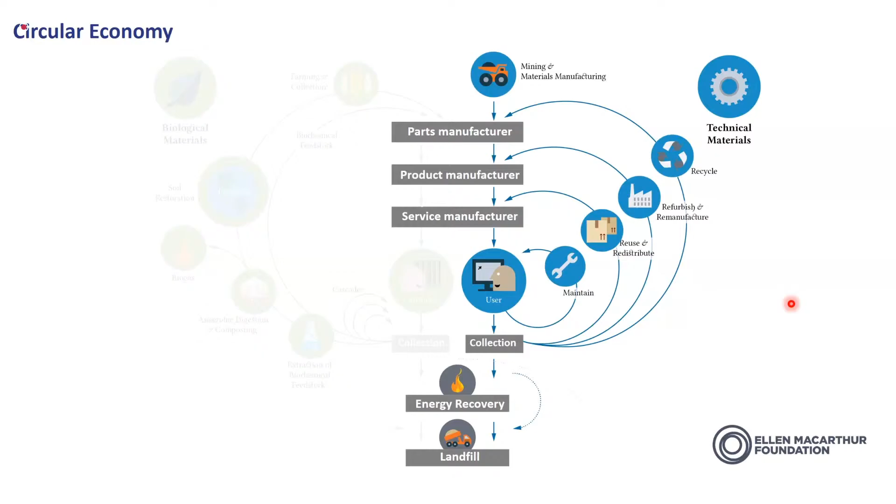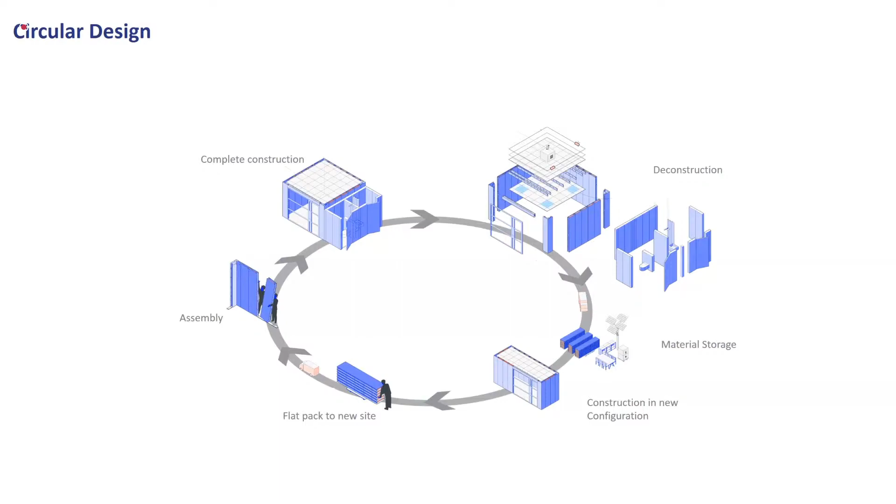I'll show you some circular principles important in designing circular design. One main point is design for disassembly, use of recycled and repurposed material, modular construction, flexible and adaptable design, and it should be easy to construct and deconstruct, which reduces labor cost. It should be easy to replace, which reduces maintenance cost. Joinery details should use bolts and screws which we can open and refix, and we should avoid welding and rivet joints in such construction.

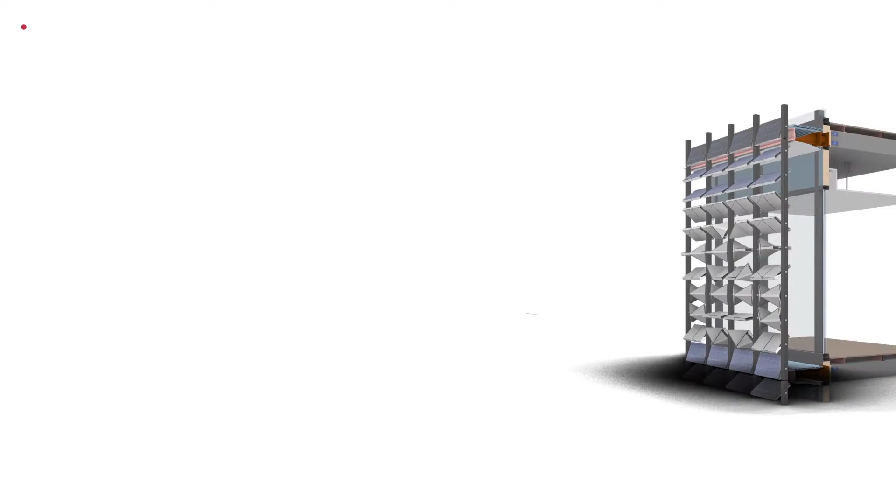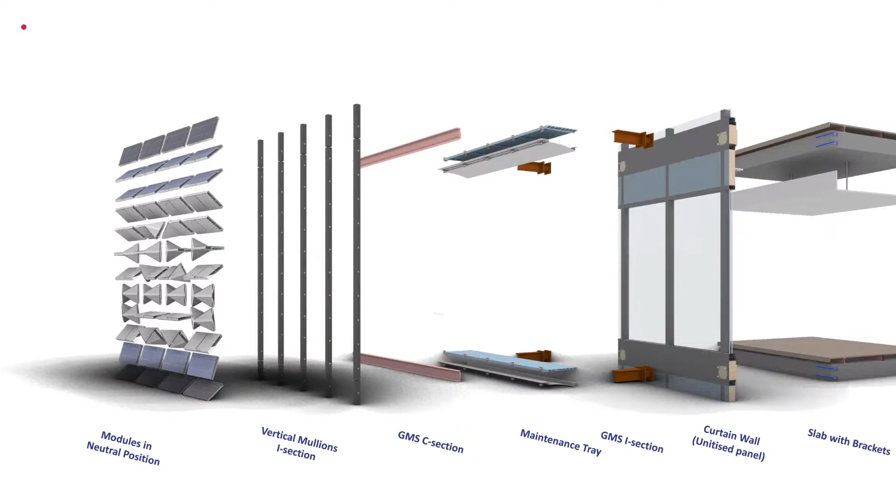A circular design approach was made by me in the same project I showed you, my thesis. A dynamic facade was created, but this facade was also designed in more detail, where I designed all different elements separately so they can be disassembled from each other. All the joints were given with either screws or bolts, and they had different layers. This can be taken further to some new construction or replacement of similar construction.

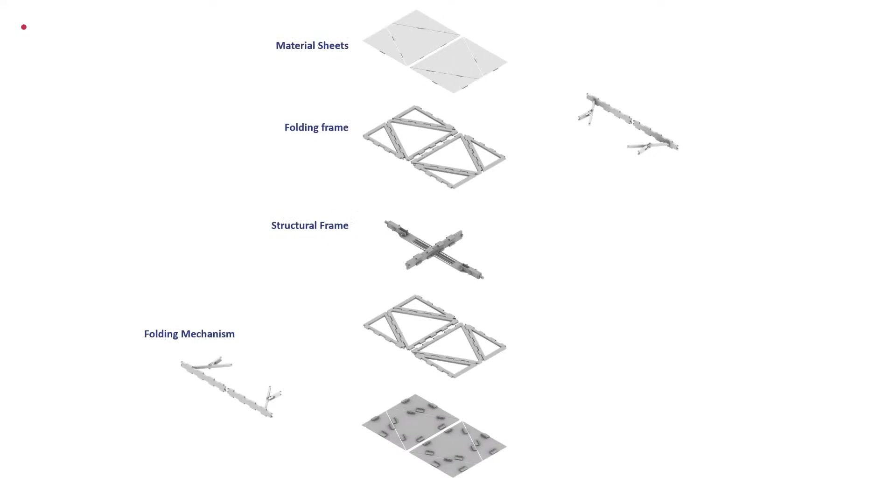Similarly, on the modular scale too, each component of this module was designed for disassembly. This page shows the full assembly sequence going from front to back, and if you take the disassembly sequence, it's the reverse order. It was designed like an IKEA product, where any unskilled person can assemble this module, and an assembly manual was also prepared which can be useful for any viewer.

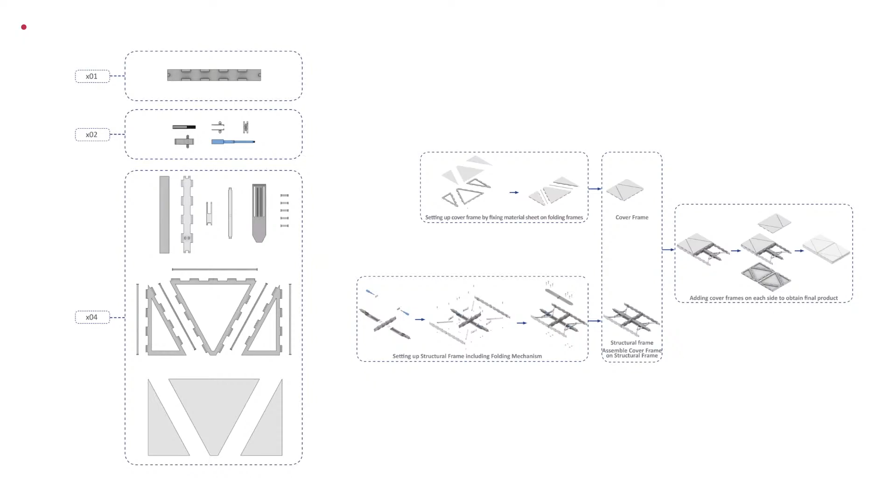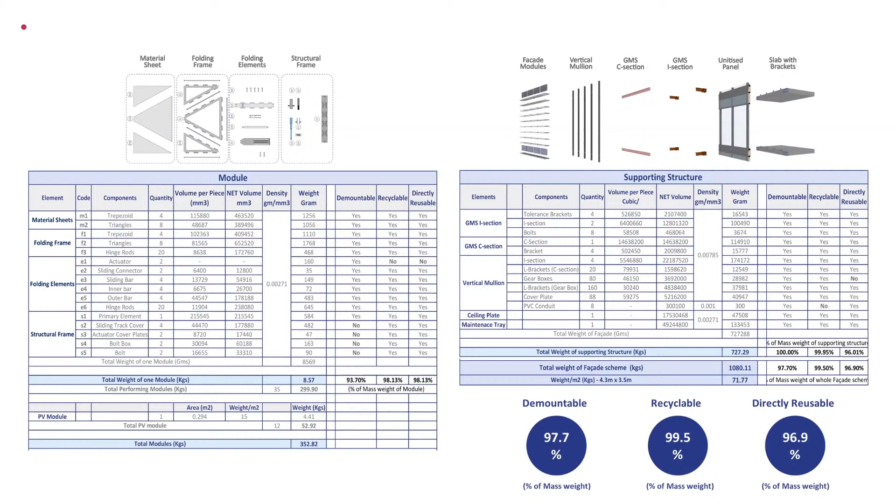A holistic approach to sustainability is when you apply all these principles in each project together with each other. Such an approach will help us achieve targets to avoid global warming, which is getting worse in this climate emergency. So is there any next step to this?

It's still a question mark. Thank you.

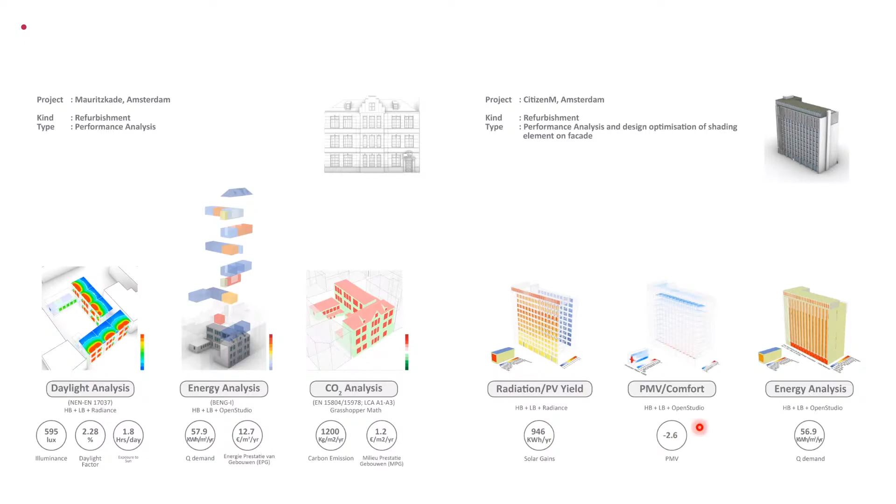For radiation, you additionally need Radiance. For comfort level, you need OpenStudio. For wind analysis, you need Energy Hub, which is like CFD, FFD. And for acoustics, you need something like Pachyderm. So these are different kinds of plugins and tools you can use for different simulations.

Thank you, sir. And I think there are several tutorials available on YouTube, and there are also prepared scripts available online from the owners of Honeybee and Ladybug.

You can directly use them, learn them, and apply those things on a very basic level in your design, like very simple simulations, which can help you understand how to take your design decisions further. That's how you can go much deeper into these things.

Yes sir. Hello, can you hear me? Yeah, go ahead. So while we're on the topic of applications, I wanted to know whether you came into using these applications after you joined your master's, or were you particularly interested from the beginning and self-taught yourself all of this? Sorry, I can't hear you clearly. Now can you hear me clearly? Yeah. So how does it go from designing to using these applications for designing?

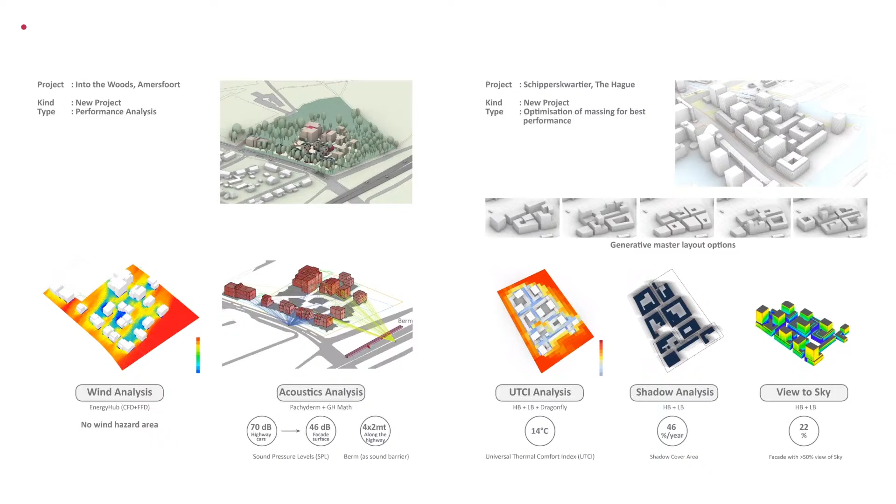Okay, thank you so much. Yeah. Good evening, sir. Good evening.

Sir, this is Manushi, currently studying in fourth year. I wanted to know your experience with Foster and Partners, because we have heard a lot about Foster and Partners and wanted to just know your experience.

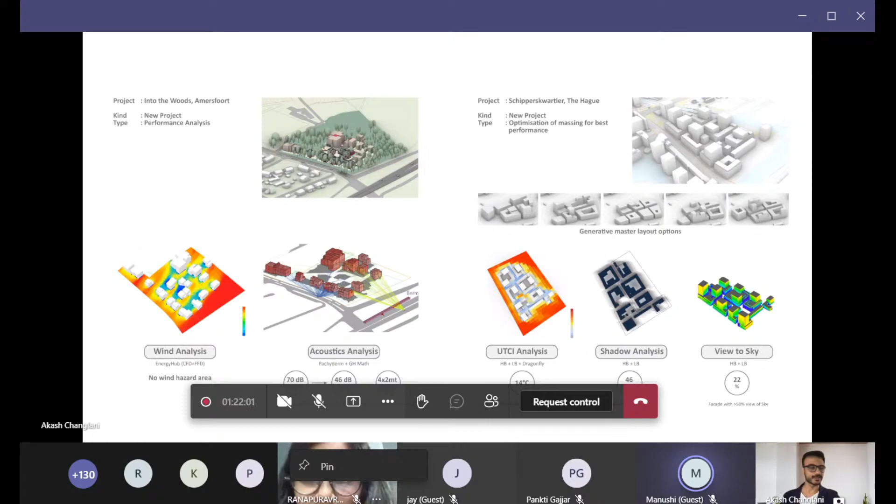Okay, well of course I cannot say anything bad because all experience over here is amazing. And whatever you expect from outside, when you come inside it's way more exciting. I think if you are in fourth year you might have already been into internship. Yes, sir. Yeah, so when you go to the office you need some kind of motivation to work. Sometimes you don't like the project task and stuff. But as per my experience, I just hear my name and I get excited. So that is one of the good parts of here.

And everyone in Foster and Partners is actually very transparent. Everyone knows what everybody is doing, which usually doesn't happen in India. I think that is one of the disadvantages. You should always keep sharing. We usually, even in university, even in my time, we used to hide our design so nobody could copy it. But I think as much as you can share your ideas with each other, you will get more and more knowledge.

And one other thing I will suggest is try to keep your approach diverse. Foster and Partners has all different disciplines within the same office, so we get to work on the same project with different expertise, and we get a lot of knowledge from them. That's how we understand how each building has reached its maximum potential. So I think it's work of a team and a good diverse discipline of knowledge.